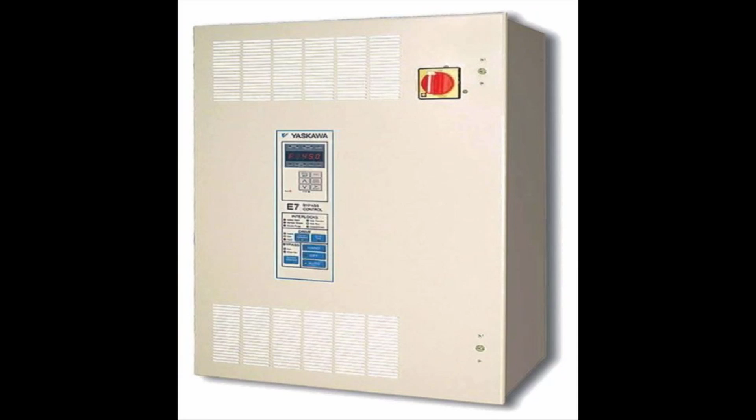You're watching the PLCopen Basics video tutorial series. This video shows how to accomplish electronic gearing. Hi, I'm Matt Pelletier. I'd like to give you a quick overview of electronic gearing and then get to work right away to implement an example and test it out.

Electronic gearing comes from the concept of mechanical gearing, where you have two shafts turning that are mechanically coupled together through some sort of gear ratio. So this picture would show your typical input gear, which we would call the master, because it's driving the output gear or the slave gear at a certain ratio. And of course that ratio is the ratio of teeth on the gear, and could also be expressed as a ratio of units moved, maybe rotations moved on one axis versus the other.

So transpose this down to electronic gearing, and you have the input master is any axis with an encoder, and then the slave, the output of the gear, is the servo axis that we are controlling. So one of the servo motors. For example, the master could be the external encoder, it could be one of the servo axes, or it could be a virtual axis. Really, any of the axes can be a master. But the slave is always the servo axis. It's the axis that the controller is commanding in the case of electronic gearing.

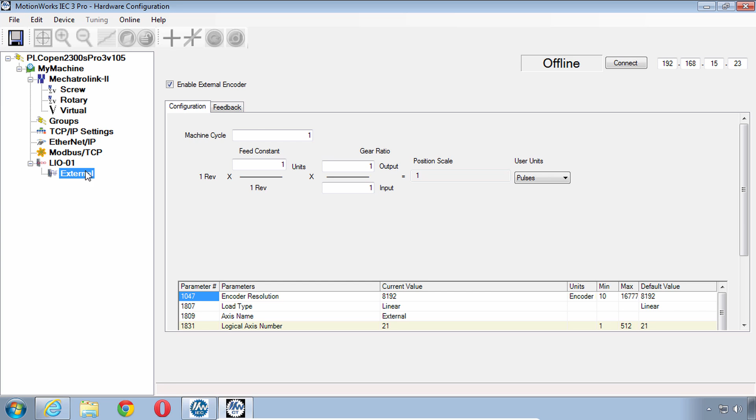So we're using millimeters on the screw. The rotary is using degrees. The virtual is using millimeters, and the external is using pulses. So if we had a ratio of 1:1 with the external encoder as the master, that would be 1 pulse for every 1 millimeter of the screw if the screw was the slave. Whereas if we use the virtual, then a 1:1 ratio would be 1 millimeter for every 1 millimeter. So the units here are very important when you're going to set this ratio.

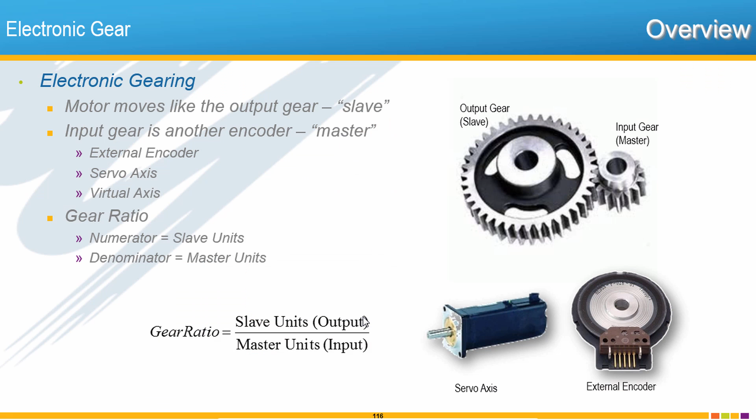Gearing in PLCopen uses the MC_GearIn function block and MC_GearOut. GearIn engages the slave to the master using the execute input. It gets master and slave axes, 2 axes on 1 block, and the ratio as the numerator and denominator like we just talked about. And then the acceleration or deceleration rate, which applies if the master is already moving, so that the slave can accelerate to the speed or decelerate if the ratio is reduced while the slave is in motion.

And then MC_GearOut, which you only need to give the slave axis, tell it to execute, and it's like separating the mechanical gears from each other. And what's interesting about gear out is that when that separation occurs, the slave will continue to rotate. However, it's not linked to the master electronically anymore. So just like if you had some kind of a clutch system, you could separate the slave from the master, and the slave would not instantly stop. It may stop due to friction, but in the case of electronic gearing, it's operating as if a frictionless system, and the slave would just continue at the previous speed.

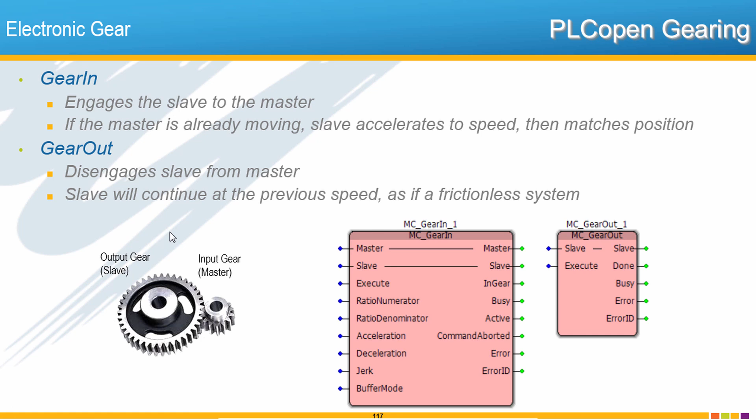So we can try out some of these things if we build an example real quick. So follow along with me like we've done before, and let's make the gear POU. So insert this program called gear. Let's put it in the medium task. Program instance, gear.

And then let's open the gear POU so we can start the program. Here's my proposed program example, which is just a very simple example with gear in and gear out, and the gear out is linked to a stop. We use an R trig here so that the done output just pulses on, thereby pulsing the MC stop so that the MC stop does not keep the axis stopped, but releases it after one scan.

And I also have a disable bit here so that we can take off this part of MC stop and analyze the behavior as I was talking about previously. So your programming challenge this time is not only to enter this code, but then to jog the master, which is the rotary axis, and then execute gear in under different conditions. The two conditions I'm thinking about are when the master is already moving, or to engage while the master is stopped, and then later jog the master.

Now the thing I want you to try is adjust this ratio. Those are numerator and denominator. And what happens if you change those? When do they update? And also keep your eye on the in-gear output and see when that turns on. In-gear tells you when you're done accelerating or decelerating between the two different speeds, and you're actually synchronized, phase locked in between master and slave.

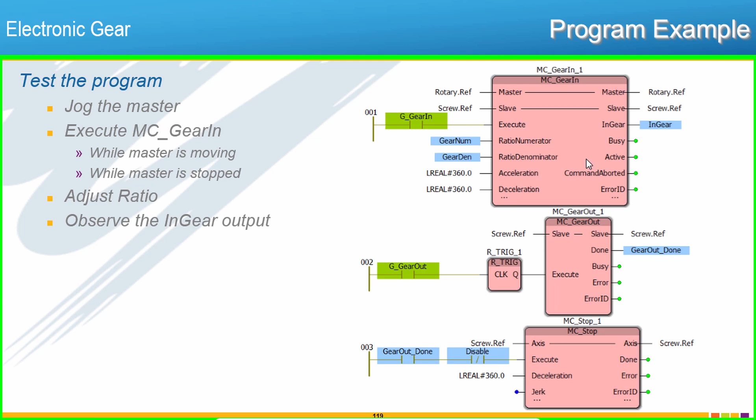These questions and a few other ones are also listed here, and I highly recommend that you use a logic analyzer just so that you can see more carefully the exact profile that the motors take, which is not always visible over the IP camera or even with the naked eye. So please refer to this page and the previous code page, and let's take some time to see what you can come up with, and then we'll review this here after the break.

Okay, we're back from the break here. On this one, I'm not going to go through how to build this. I think at this point that's not an issue. All right, let's go over the gearing program and look at some of these questions. First thing to do is be sure that you can jog. And I needed to build the jog for the rotary axis. And I notice my speed is 0. And that shows me I need to do a warm start to load those initial values that I know I put in there. So my servos are enabled.

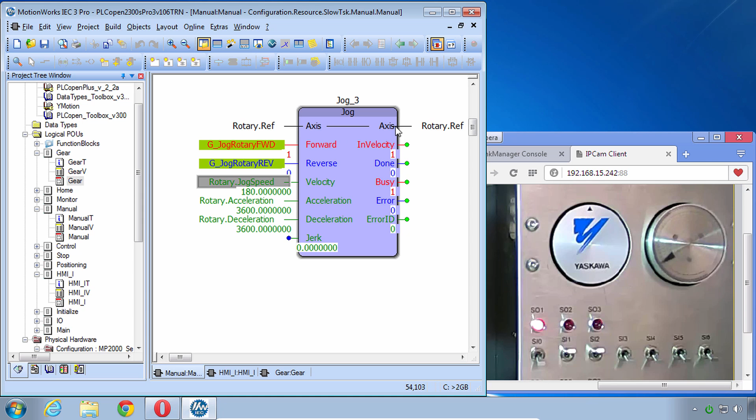Now let's jog that right-hand motor, the rotary. And the manual POU confirms that that's operating properly. So I'll close that and split my window here. And I'll give it a shot. Some of you can see that I have a mistake already. Do gear in. And you see I've got an error. It's a very common error. That's why I wanted to show it. Let's see what this error is here. 4666.

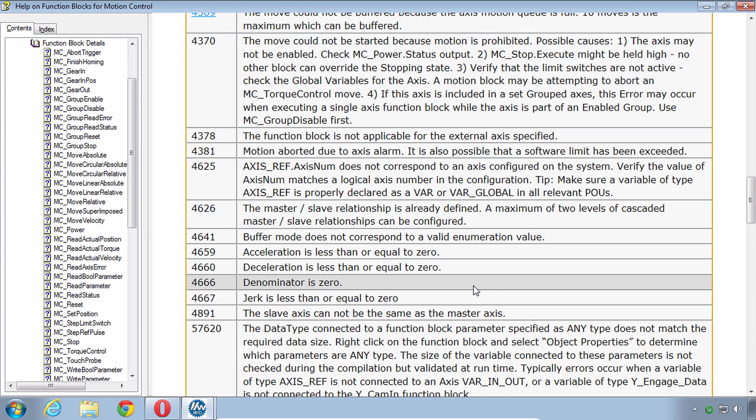Go to help. And 4666, gear denominator is 0. Can't divide by 0. That happens if you don't have an initial value. Let's start with a gear ratio of 1 and re-execute the gear in. There we go. And a 1-to-1 ratio in this case is really 1 millimeter for every 1 degree, but the way our units work out, it is also 1 rotation to 1 rotation ratio.

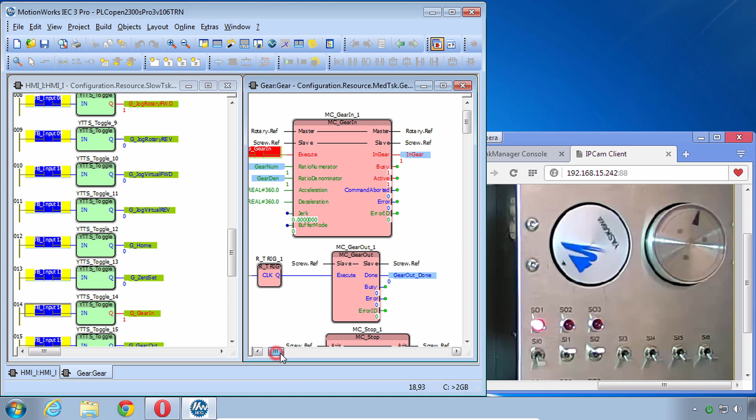And so this first question is, what is the difference between executing MC gear in when the master is already moving, like we just did, versus when the master is stopped? And why don't we use logic analyzer, and we'll add to that master speed, slave speed, and in gear. So I'll start with in gear, right here. Add to the logic analyzer. Let's see what we have there in the logic analyzer. I have just in gear. So we'll need to find the two speeds.

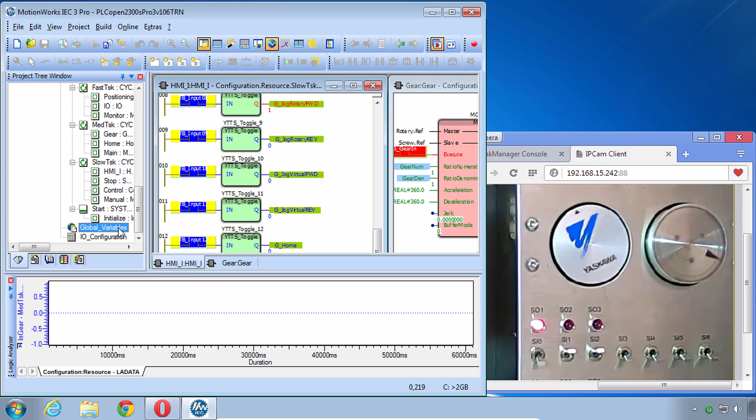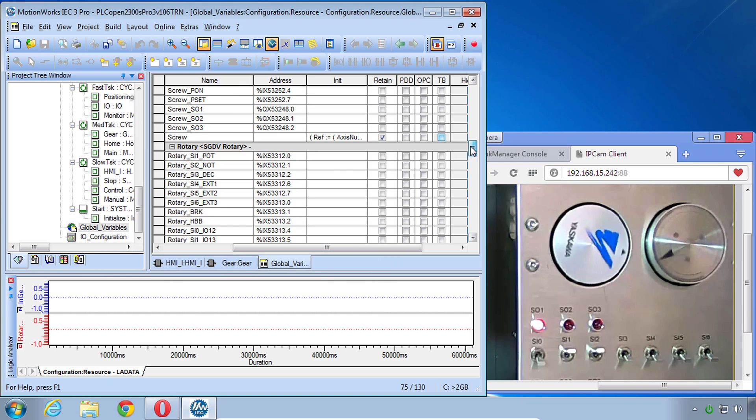And one way to do that is from the project tree. I know that the global variable for the axis can be added to the logic analyzer. And when you right click on that structure, you can choose the parameter that you want. Remember, the axis parameter struct gives us the actual velocity. So let's choose the actual velocity. Let's also do the actual velocity of the screw. Add to logic analyzer. Then under PRM, again choose actual velocity.

So I'm going to remove gear in and give it gear out. And watch it stop here. Notice the master keeps jogging. I think I'll stop the master. And now we set up the trigger configuration. And let's use this in gear rising edge. It means we're triggering on that in gear output.

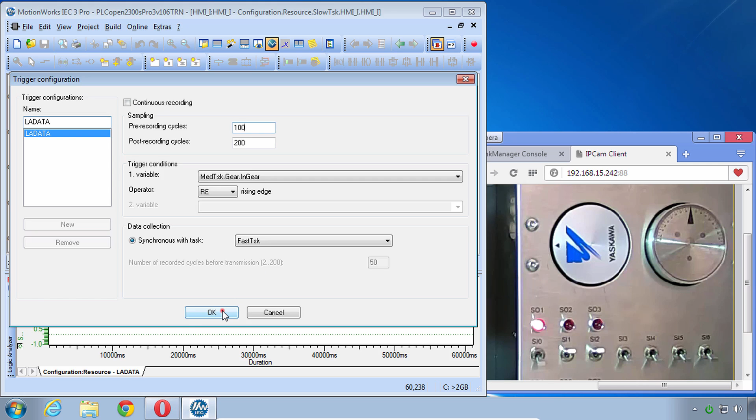So we'll need to see what's happening before that. Maybe 100 cycles before that, and 200 after. Let's try that. So you can hit record here, start recording, or F11. Jog the rotary. And toggle gear in.

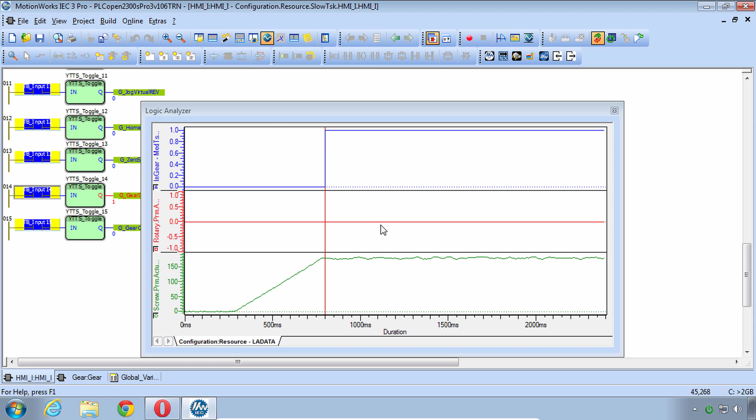So here, let me disconnect this logic analyzer. And we see that in gear turned on. And I see one issue right away. It looks like my rotary speed is not coming up. That makes me think that we had never monitored the parameters for the rotary axis. So why don't we go check on that?

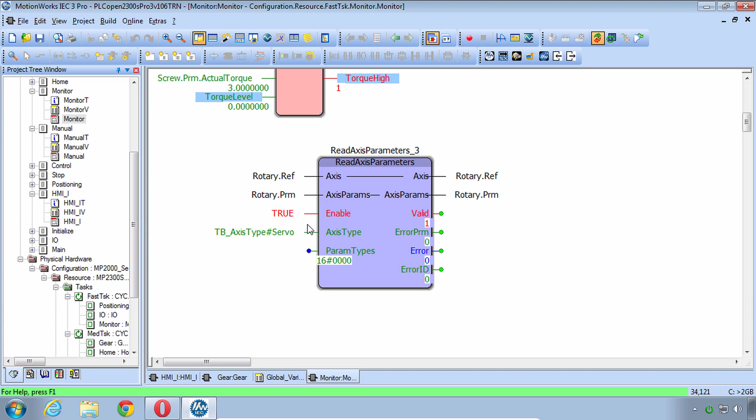And yes, that is true. We did the screw and the virtual, but I never did the rotary. Okay, so now I've implemented read axis parameters for the rotary, and I think we can turn the gear out. So now let's hit record and try that again. Recording, waiting for the rising edge. I'll hit gear in.

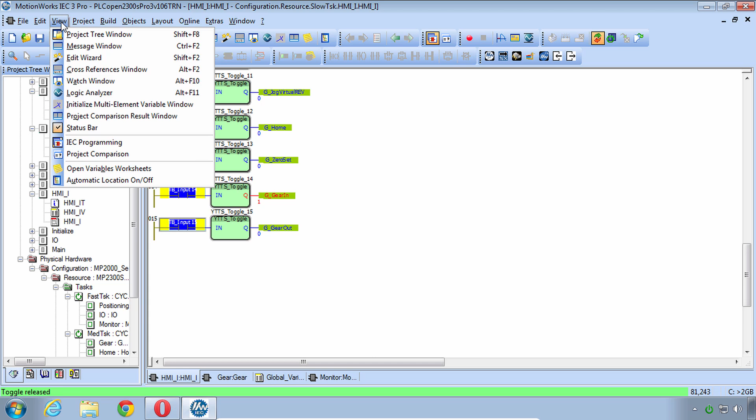And now in the logic analyzer. That looks a little bit better. So here we see the feedback speed of the rotary axis, and it's just showing every single fluctuation that it's experiencing here around 180 degrees, about 175 to 185 right here with the default tuning. And the actual velocity of the slave, of course, is trying to follow that.

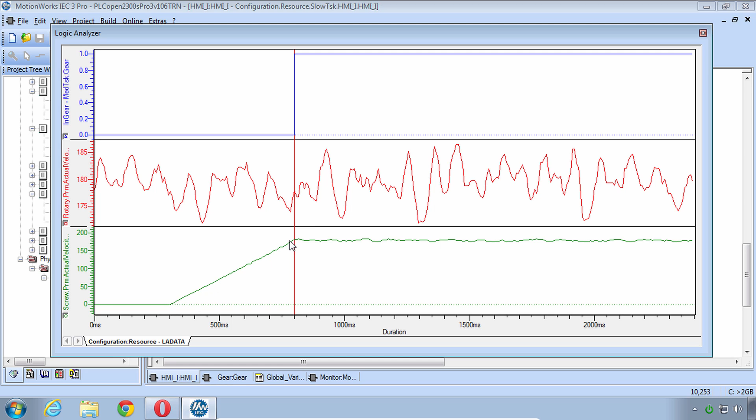And now using left click and drag and right click and drag, you can kind of zoom in on there. But the important thing that we're looking at here is that there is an acceleration. And this is that acceleration rate that we programmed in at 360. So now for comparison, let's start the graph again.

This time we'll engage the gear and then immediately jog the rotary. So engage gearing, jog rotary. And I'll stop the jog. So you see that the jog stopped immediately and the slave is still synchronized, so it stops immediately with it.

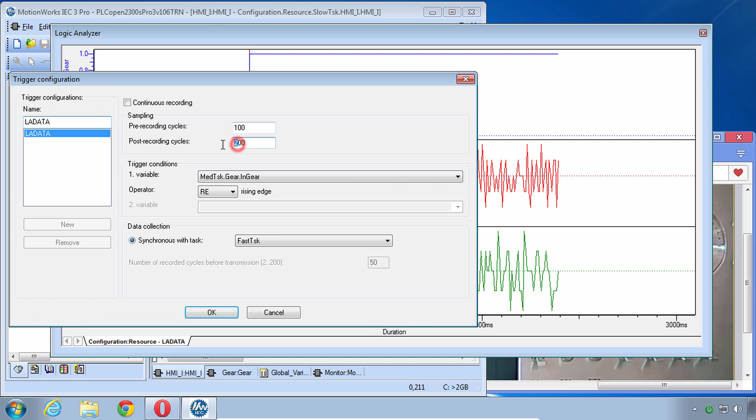Now view the logic analyzer. And it looks like I'm stuck here at 0. I didn't get quite enough time. Let's change the trigger settings here. Give it a bunch more time. Okay, so we'll remove gear in. Let's do a gear out. Be sure it's out. Now start recording.

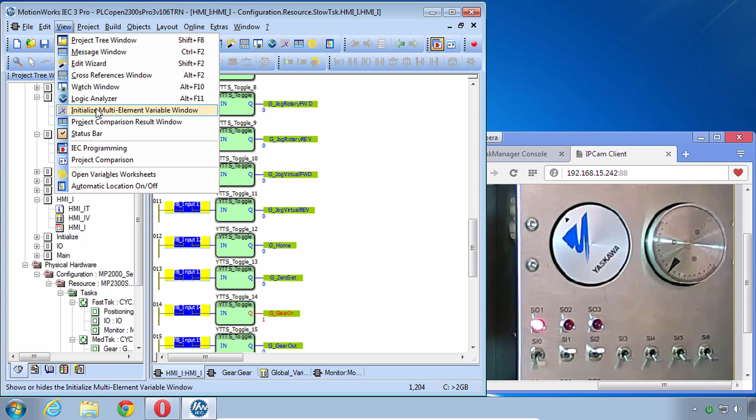And we'll tell it gear in and jog the rotary. You can tell even visually, it just took off right away. I'll stop the rotary. And let's look at the logic analyzer. And here you can see the difference in the sequence. In gear came on ahead of time, and they both accelerated at the exact same rate at the exact same time.

So the conclusion might be that if you want the axis to remain phase locked from the beginning, the easiest thing to do is leave the master stopped, execute in gear first, and then start the master after the slave or slaves are engaged to that master.

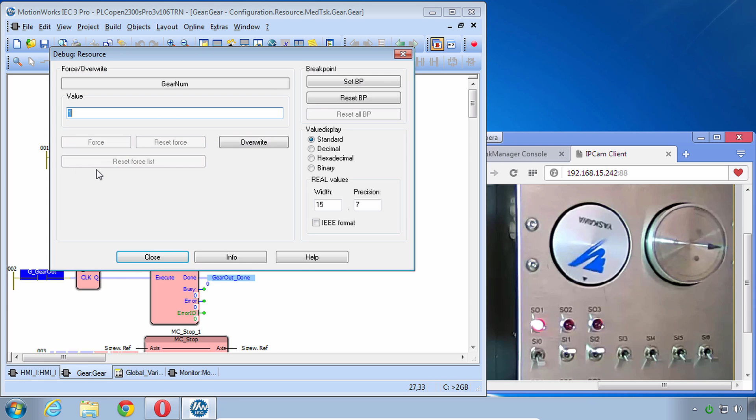Question number 2, how can the gear ratio be changed without stopping the slave? And I think that was pretty easy to show. Let's engage the gear and jog it. And then here in the gear POU, just go and change the ratio. Let's change the numerator, maybe from 1 to 4, something that's easy to see.

But notice right now it's still going at the same ratio because, remember, PLCopen, rising edge of the execute input. So we'll need to toggle this gear in. We'll do that through the HMI. Just turn this off and then toggle a gear in again. And now it's running quicker and the in gear has turned on.

And you could change it back to a 1 also. And we could even record this one. So recording, looking for this rising edge of the in gear input. So I'll go execute in gear again. And you see the slowdown came.

See what we've caught here in the logic analyzer. So it looks like we caught the end of this decel here. So there is some transition time based on the accel and decel rate.

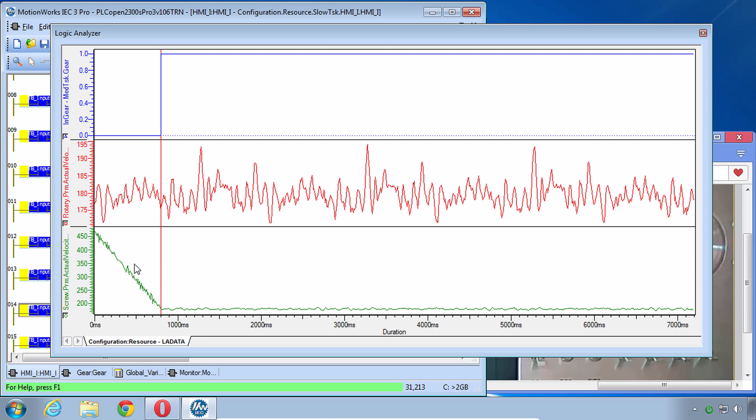Number 3, under what conditions does the slave disengage and no longer follow the master? One way to test this would just be stop the master and see if the slave follows it. So we can easily stop the master. We can see right now it's engaged. What if I take off the gear in input?

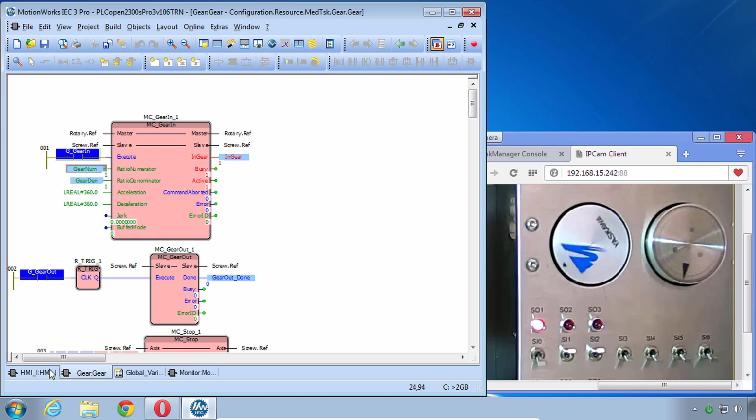So now the execute input is no longer running, but you know what? It says here in gear is still true, so I'd expect that it still is in gear, and that is the case. So obviously if we were to gear out, now we can see that the slave is no longer following the master. But this question 3 really leads into question 4.

Disable execution of MC stop. How does this affect operation? And does the slave still remain engaged then? So we'll jog the master. We'll gear in the slave. Can release that gear in.

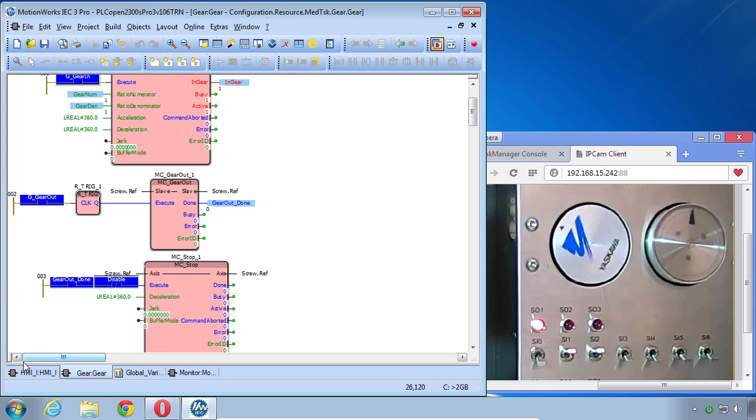And now in the gear code we have this disable bit, which you should be able to overwrite to a true. And that's going to prohibit the stop from executing. And you'll see now why we need the stop. Back to the HMI POU, let's gear out. And it doesn't seem like anything's happened. If you look over here at gear, however, it shows that we're not in gear anymore. So that should be a clue for you.

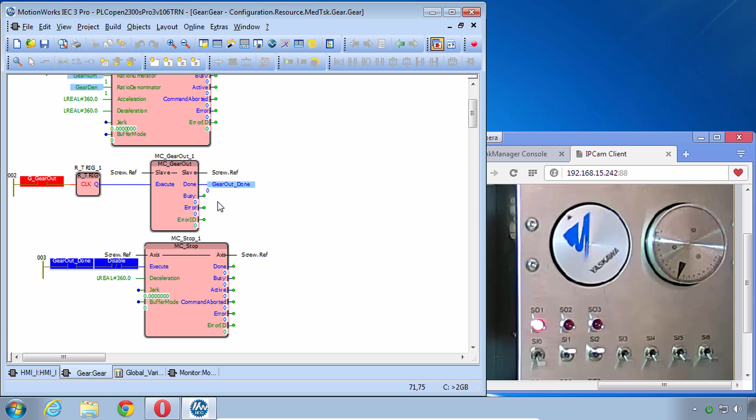And if we go and stop the master, you see that the slave continues. So slave's continuing at the previous speed. This is an important property of the PLCopen gear out function block, is that it does not stop the motion. Instead, it leaves the slave to run at the previous speed, but no longer following the master, obviously.

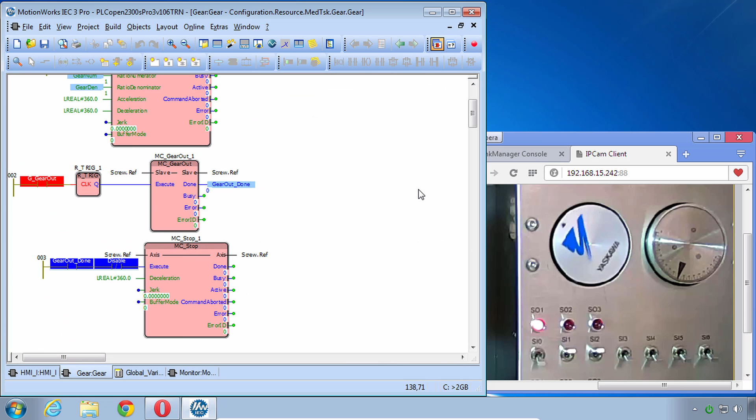Now question 5 says change the master to the virtual axis. And what are some advantages and disadvantages? So I will show that code change. It's not too difficult. We just go here to master and change it to virtual.ref and download changes. All right, close the resource, back to debug mode.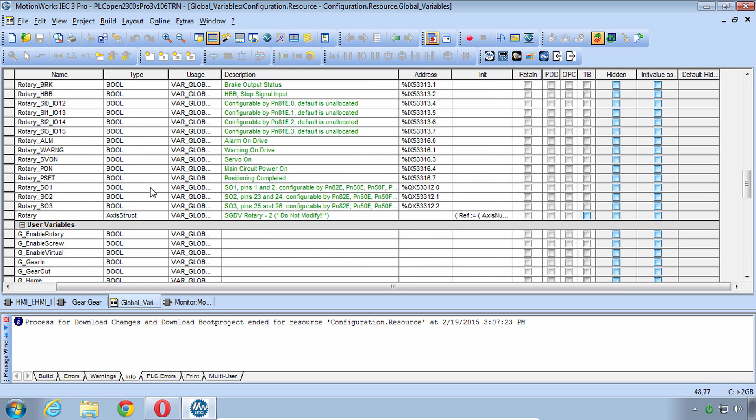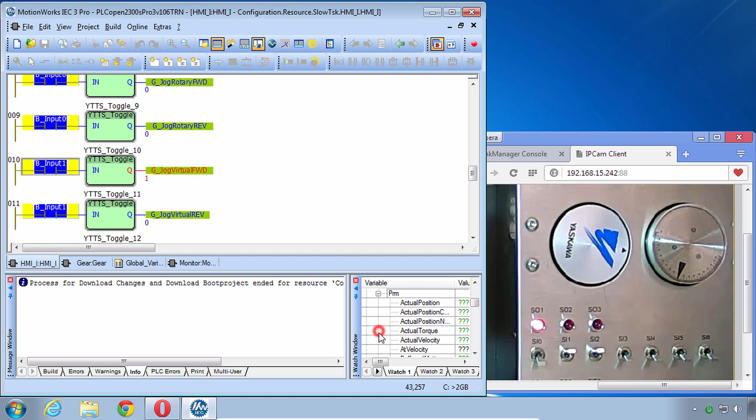I think it's probably also a good idea to add the virtual axis speed to the logic analyzer. So go add to logic analyzer. We'll take the PRM called actual velocity. I think to stop this axis, we're going to need to just go up here and stop them all and turn that back off. And now let's jog the virtual axis. And if you're not convinced, you could view that in the watch window. The virtual PRM actual velocity right now is a perfect 180.

Let's record this one before I do it. Down to gear in here, let's turn that on. You can see now we're gearing to the virtual, just like we were to the real axis. We can change that ratio just like on the real axis. So overwrite it to a 4 and then re-execute the gear in. And now it's going fast again.

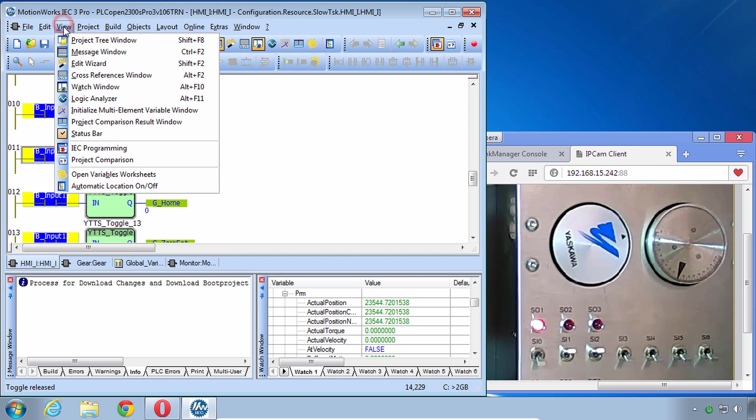And we can stop jogging the virtual. And it stops. We can go the other way. Takes off the other way. And let's take a look at the logic analyzer. If you really want to see what the servos are doing, the way to look at it is with SigmaWin Plus over USB connection. But discussing some of the advantages and disadvantages, there's a lot of advantages to using the virtual axis.

Number one, of course, is that if all you need is a master, you can use the virtual axis, and you don't have to buy an axis to run anything else. So the virtual axis really acts like an internal clock, and you can then use your real axes to slave off of the virtual as the master. And one advantage that has is just in performance, axes are automatically synchronized to each other.

I think the only disadvantage, the virtual axis does not behave exactly the same as the real axis, so there may be some coding differences. And of course you can't really see the virtual axis, so that could be a disadvantage also. But there's definitely a place for the virtual axis, and performance is generally increased when all of the slaves are gearing off of the virtual axis versus using one of the real axes as a master.

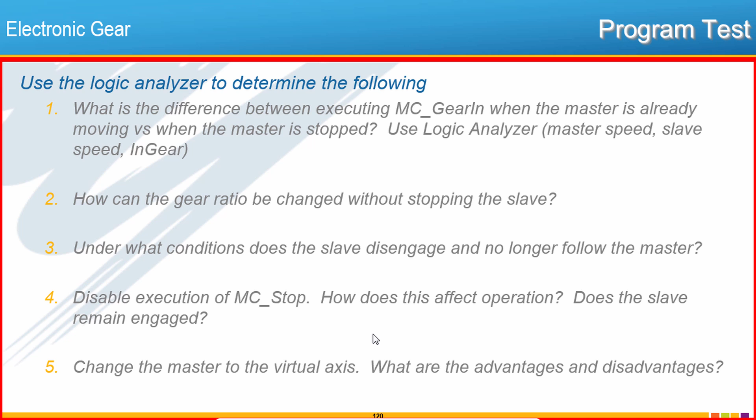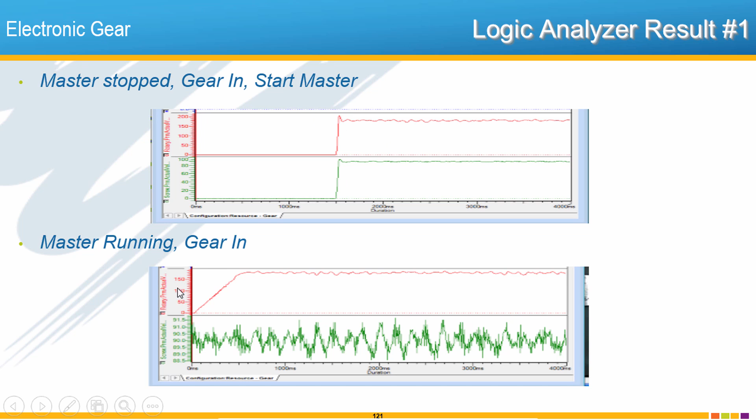The final page of this section is just a reference here for you to look at the master when it's stopped and geared in versus the master already running and you gear in with that slower acceleration rate. So this is the end for this section. So it's time for us to wrap it up and do a final save as and zip it here to project 12 gearing. Thank you.